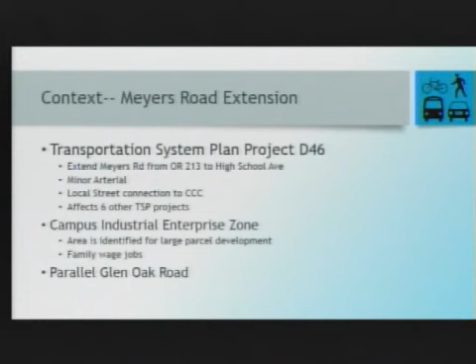So this is the general area. You can see the Meyers Road extension is the dotted line, and also the dotted line that was the Loder Road extension as it was identified in the transportation system plan, unrefined, but basically a placeholder for that there will be a connection.

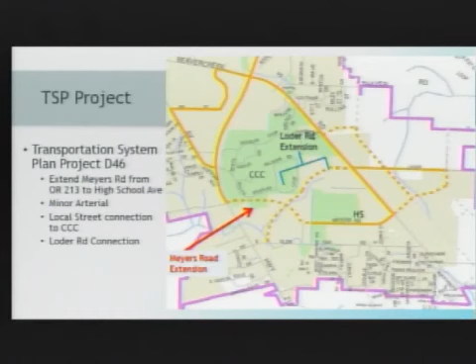There were multiple plans that we looked at, recognizing that the TSP has multiple long-range planning projects, and the regional transportation plan also identified connections. At the same time, Clackamas Community College is working on updating their master plan, and the Oregon City School District is working on a project to add a bus facility next to High School Avenue that would tie in with part of Meyers Road.

In addition, the parks are working on a park project that is just south of Meyers Road, and I don't know if this is not quite working. So anyway, I think you need the other one.

So right here is the... there you go, it works. Much better when you hit the on button. Thank you. Cool, I just assumed it was on. All right, so anyway, that works a lot better.

It's rocket science, so yeah, here's the parks project. This is the different alignments that were identified for connecting Meyers Road.

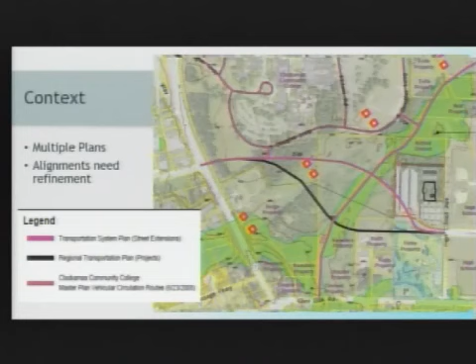So, given the need to coordinate with all the different projects moving forward, the school district is moving forward with the bus facility, CCC is working on their master plan update, and there's the desire to get some jobs and some development in the enterprise zone.

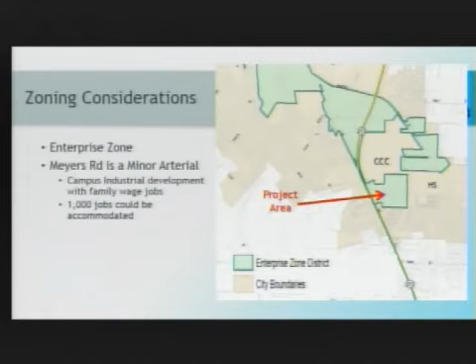There was a lot of coordination that needed to happen. We considered the needs of the regional plan, we considered the needs of Oregon City, and tried to make sure that we were leaving lots that were the right size for development.

So given that, the Oregon City team put together a team that included major stakeholders. Oregon City has Public Works, Parks, and Planning represented on the project management team. The Oregon City School District, which was moving forward with the bus facility, Clackamas Community College, and ODOT were all at the table as we were looking at designs that could work for the area.

In addition, design was informed by neighborhood associations who were reached out to. Property owners were interviewed and talked to about what they cared about, so early on there was an analysis of that. TriMet was also consulted.

In addition, we took into account the zoning requirements and issues around natural resources. There's a natural resource zone that comes through that area, so our team was looking to minimize impacts given that, and to also work for all the different planning projects going forward, making sure we had an extension that would work for all the stakeholders, particularly Oregon City.

So with that, we undertook a transportation analysis to see what kind of design would meet those needs.

Thank you, Elizabeth. Again, John Replinger, and I've had the pleasure of being here numerous occasions before, mostly talking about development review. With this particular case, I was pulled into the project team from the beginning to do the transportation analysis, partly because of my familiarity with all of the development and some of the TSP activities from Oregon City and my general history.

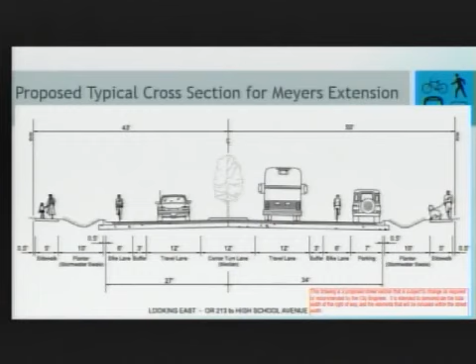I have 5 individual slides in here about each of the intersections. Here's the cross section. I have individual slides on the 5 intersections. I'll just go through quickly and come back to them if needed.

Meyers Road, High School Avenue, and Loder Road would come in at the corner with the high school, the maintenance facility, the school bus maintenance facility, and the park. It would operate fine as a 4-way stop control intersection.

We referenced Loder Road here, but I don't think we've explained that we've actually got a configuration for Loder Road. Going back here, you can see the green is Loder Road. This is where Loder Road would come through. As Elizabeth explained earlier, the TSP showed Loder Road sort of coming through here.

For a variety of reasons, in terms of the amount of land use and the environmental impacts, Loder Road was reoriented for this connection. So Meyers Road, Loader, and High School Avenue would operate just fine as a 4-way stop. There's been a fair amount of discussion with the high school and school district about the configuration of Loder Road, and we're confident it can be squeezed through, taking advantage of existing pavement and minimizing impact on the athletic facilities, as well as minimizing the amount of land needed from the maintenance facility. But this would be Loder Road.

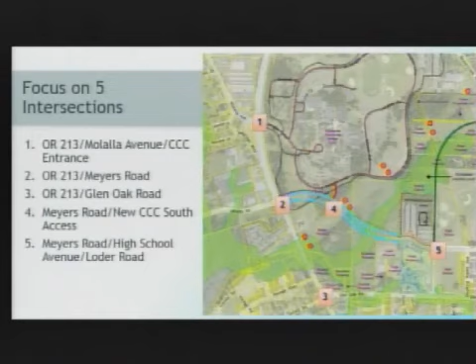That's the end of the rundown on the 5 individual intersections which were the focus of the traffic analysis for this project. Again, the conclusions are: the 3-lane section is appropriate for Meyers Road, 4-way stop control for Meyers, High School, and Loder will function quite acceptably, and a T-intersection where Meyers Road provides access to the community college on the south side will work with stop signs on that community college approach.

There is an additional northbound lane that will be needed on Oregon 213 at Meyers Road. There's a lot of growth in regional traffic. We currently have 2 lanes southbound on 213 at that location, which helps a lot during the evening peak hour. We need the additional northbound lane to help with the AM peak hour by 2035.

Eventually we will need - we've planned for 3 lanes on the new section of Meyers Road - the westbound Meyers Road at Highway 213 to have separate left turn, through, and right turn lanes. That's going to help us with traffic operations there.

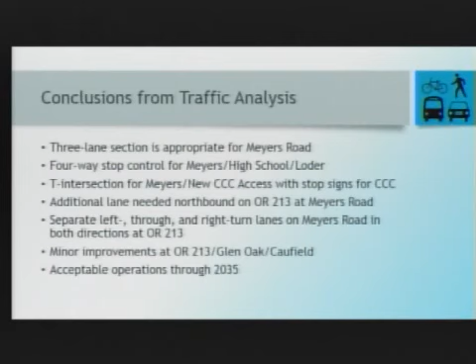For Meyers Road Extension, I'll go ahead and flip to the next slide. There's quite a few pedestrians possibly using this facility right next to the high school and Clackamas Community College.

So we took a real strong look at how pedestrians are going to move through the area. We provided sidewalks throughout the entire length of the project on both sides, as well as reconnecting the Clackamas Community College path and running that parallel at the west end of the project. This gives pedestrians or bicyclists some options for how to get through the corridor - use the sidewalks as normal, or possibly go up onto the campus and off track.

We originally looked at providing a path the full length of the project, but because of some practical and safety considerations with the way the bus facility is and access in and out of that, we determined it would probably be safer to have the separated path away from Meyers Road, so there wouldn't be a conflict with buses coming in and out and the pedestrians on the facility.

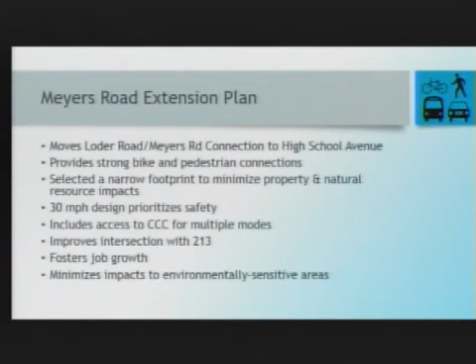And that's kind of, in a nutshell, a couple of key drivers that got us to this point.

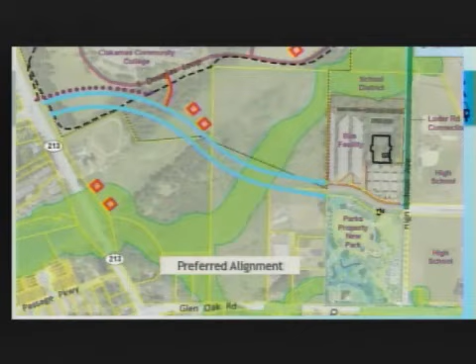So we talked a little bit about how this plan affects the other transportation system plan projects in the area. For the Loder Road Extension, this project got us to a decision, kind of pushing that along. With the high school doing their development, they were conditioned to use High School Lane or High School Avenue as part of the Loder Road connection for the future.

John alluded to that a bit. There's some parking along the side of High School Avenue there that will be part of the roadway for Loder Road when that does come through, so there'll be additional work to finalize the configuration of that roadway.

And John mentioned the roundabouts. We looked at roundabouts for a number of reasons. They're desirable from some points of view, such as traffic calming. We did look at what would happen if we had a roundabout somewhere in the connection with the community college or some other location.

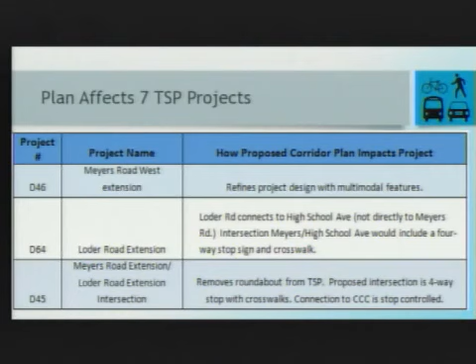So if you look at your more detailed handouts here, we show how the crosswalks would be configured as part of this project. We did talk with ODOT along Highway 213 about when they plan on adding sidewalks to fill that in, and they don't have plans to add sidewalks until there's another major improvement that goes through.

So Meyers Road connects to the existing path on the community college property, providing a place for pedestrians to go in that direction. But to the south, there are no sidewalk facilities planned down to Glen Oak Road, and that would again be in the future.

We do provide the lane going through to the north, but not sidewalks. There'll be an additional crossing along the south side of the intersection, but it wouldn't proceed to the south on the east side of Highway 213.

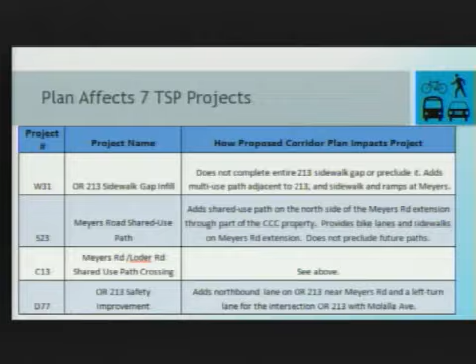Yes, this would change it a little bit. That's part of the transportation system plan, as I understand, but not part of this project to add another lane. I turned there just today. It's possible that was a typo in the TSP and was really referring to a left turn lane at Meyers Road. That makes sense.

Okay, thanks. Sorry, did you say there were some - I don't see it in the crosswalk configuration. Okay, you were saying there was somewhere, are they on a slide? Yeah, it might be on your detailed plan there, it's the aerial.

No, those are sidewalks, he said crosswalks. The crosswalks are here. You'll see the black stripes there for the crosswalks, where we have the alignment of the roads. When you said detail, I thought you meant like a cross-section showing how the crosswalks were going to be configured, not just a layout of what the crosswalks are interpreted to be like. Okay, again the detail could change when we come down from 50,000 feet.

Is it question time? Yeah, I think it's question time. This is question time. My last slide here, so we're just saying the first section will be built. Will we have to get there... oh, here we go. You skipped ahead. Go back to the last one. You jumped ahead.

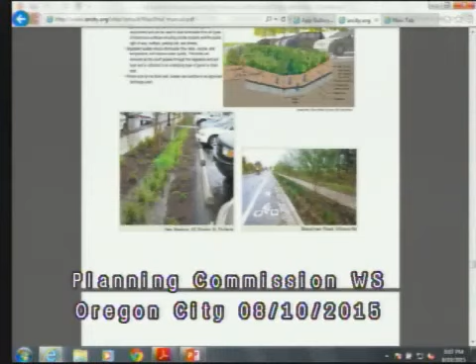About how wide is that bike lane? If you consider the concrete, that looks about 6 feet. Does it? Yeah, about 6 feet, because that bicycle symbol is about 5 feet wide.

When you stencil it in, there's a buffer strip. One other consideration with the dots is we heard quite loudly from some folks the fear that if there's debris in the bike lane, they have to pull out, and they were concerned about rumble strips in particular and dots because bicyclists are likely to go down. If there's an outer strip, only a foot or two of the bike lane is usable, right next to the stripe if not on it—the rest is glass and road debris. That's a lot of times the case, which messes your tires up.

They were so concerned about the rumble strips or dots because oftentimes they're avoiding them. Okay, well, we'd like you to come up with something that takes care of our consideration. We will be happy to consider whatever, but you heard what we said. Rumble strips have the advantage of being able to drive the street sweeper over them and clean the bike lane too.

I think that's sufficient to let drivers know they're drifting. The ones that are speeding are going to drive across a rumble strip no matter what, because they're cutting corners and doing all the stupid things they're not supposed to do. Well, that's what the police are for.

I've heard that there are types of stripes that just have little quarter-inch bumps, and that might be a good solution for something like this.